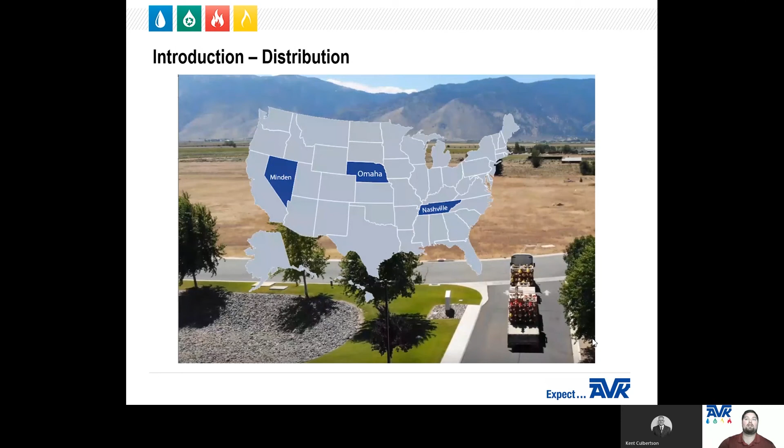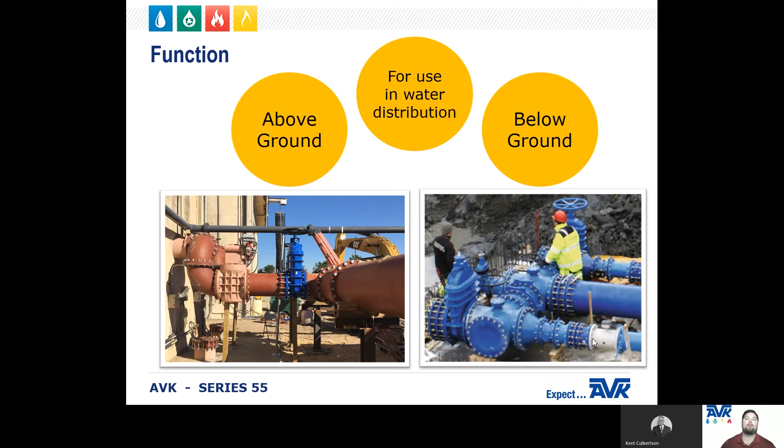Now, for the reason we're all here, the AVK Series 55 large diameter gate valve. Gate valves are one of the most commonly used valves in water distribution systems and are suitable for both above ground and below ground installation. These valves are used for on-off services only and are installed in pipelines as isolating valves. That also means that they should not be used as regulating valves.

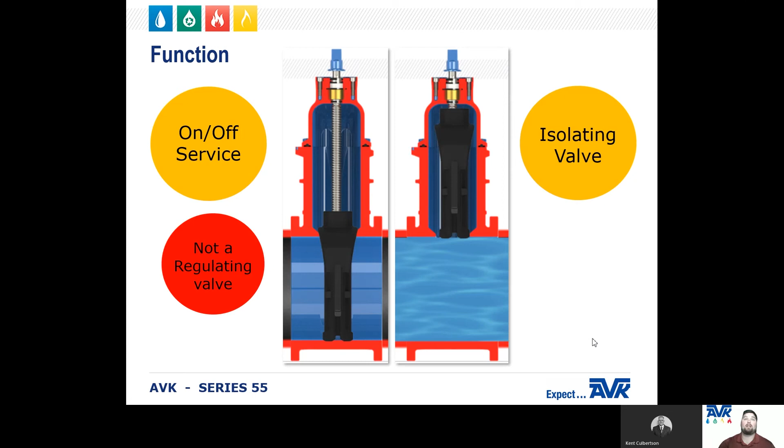The valve stem of the gate valve has to turn multiple times to go from open to closed positions. This slow operation prevents water hammer effects that can be caused by a quick closing valve. This also means that if you need a valve to open fast or close quickly in emergency conditions or to control flow, a gate valve is not the best choice.

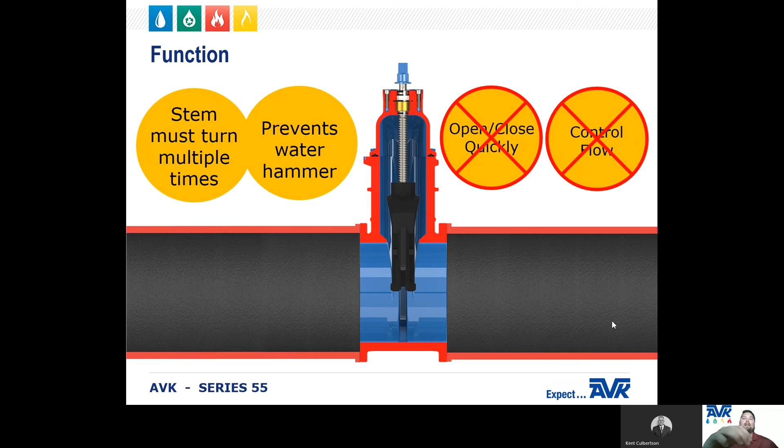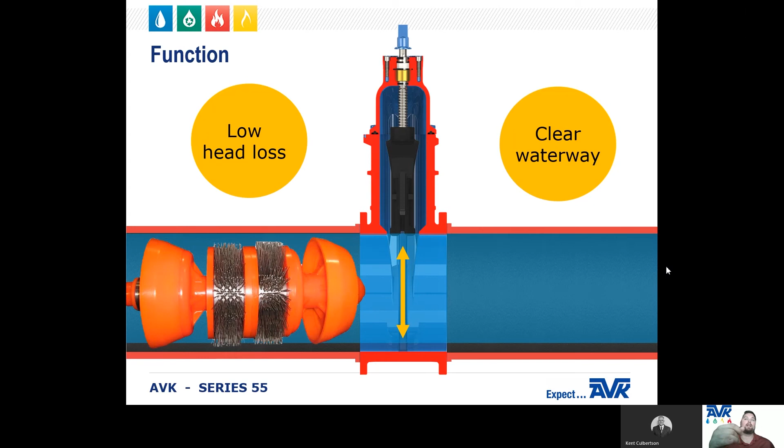Gate valves are often used when minimum pressure loss and a full bore is needed. When fully open, a typical gate valve has no obstruction in the flow path, resulting in very low head loss. And this design also makes it possible to use a pipe cleaning pig, as you can see in the photo.

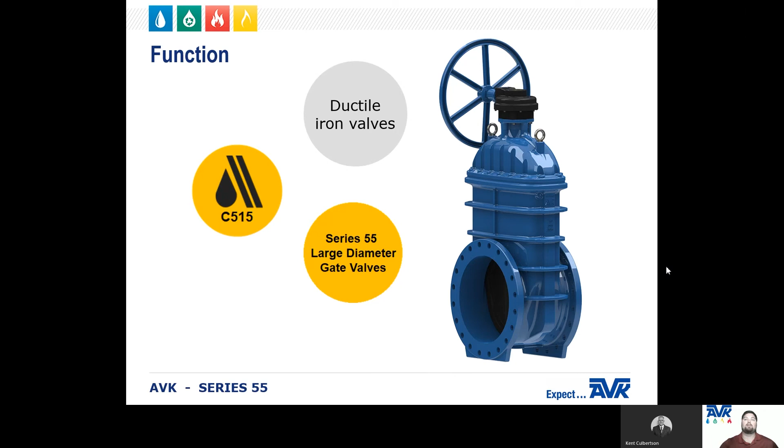These gate valves are cast with ductile iron and designed to meet the requirements of AWWA C515. There are only 2 types of gate valves, the OS&Y meaning outside screw and yoke, and NRS meaning non-rising stem, and we're happy to provide both of these options.

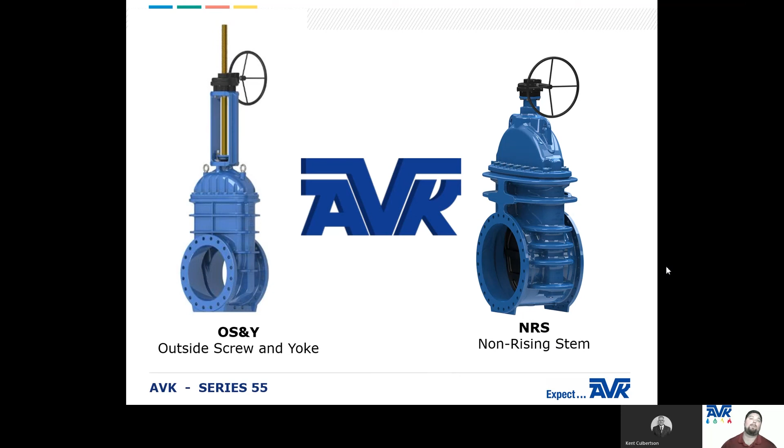If you look at your OS&Y, you can see the difference there in the photo. That stem actually carries the wedge up and that stem shoots above that hand wheel. So if you walk into your room or your pump or your lift station, wherever you may have your valve, you can see whether or not that valve is opened or closed based on the orientation of that stem. Where your non-rising stem, you can see the wedge is still in the bottom, and that wedge rides up and down on the stem inside the valve body and bonnet.

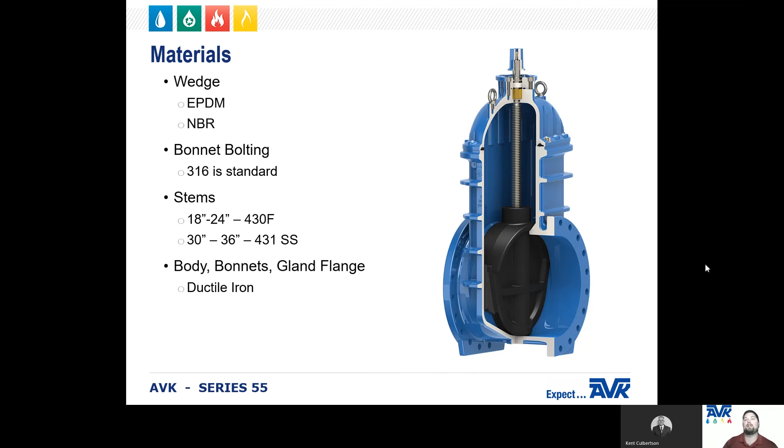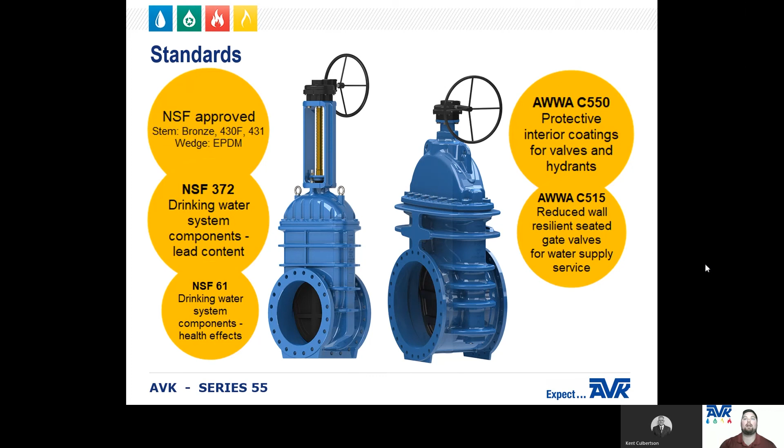As we discussed earlier, the Series 55 valve bodies and bonnets are made from ductile iron. The gland flange, wrench nut, and wedge core are also made from ductile iron. The standard bolting is 316 stainless steel. These valves are fusion bonded epoxy coated to the C550 standard, and the standard stem on the 30 and 36-inch valve is made of 431 stainless steel and 430F stainless steel on the 18 through 24-inch valves. When equipped with our standard 430 series stainless steel stems and an EPDM wedge, these gate valves are NSF 61 and NSF 372 approved.

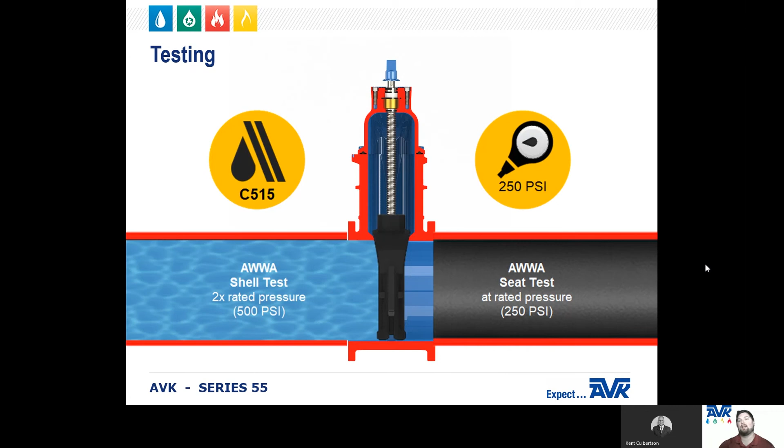We seat test these at a rated working pressure of 250 psi to start with. They are then shell tested to twice that at 500 psi. Although this valve is rated for a working pressure of 250 psi, most waterworks applications like your city main or rural water system operate at 50 to 80 psi. So in addition to seat testing this valve at the rated working pressure, we perform an additional seat test at 30 psi to ensure that the valve maintains a leak-tight seal at low pressures.

So looking at our testing, here's our overview. First, the gate valve is open and the valve is filled with water to eliminate any air. Then the gate valve is closed and one side is pressurized to the desired testing PSI, which as we talked about was 30 PSI, and then checked for leaks.

Then the valve is cycled, opened, and closed and tested at 30 PSI in the opposite direction. The process is performed again at 250 PSI. To pass these tests, there must be no leakage at high or low pressures.

Finally, the valve is opened and then subjected to a 500 PSI shell test. To pass this, no leakage through the valve shell or sealed surfaces is allowed.

So if anyone would be concerned about the valves leaking from stems, gaskets, or bolts, this should put their mind at ease that every single one of our valves is thoroughly tested with water at the factory before shipment, and through our serial number traceability, we can tell you all of the data regarding that test as well.

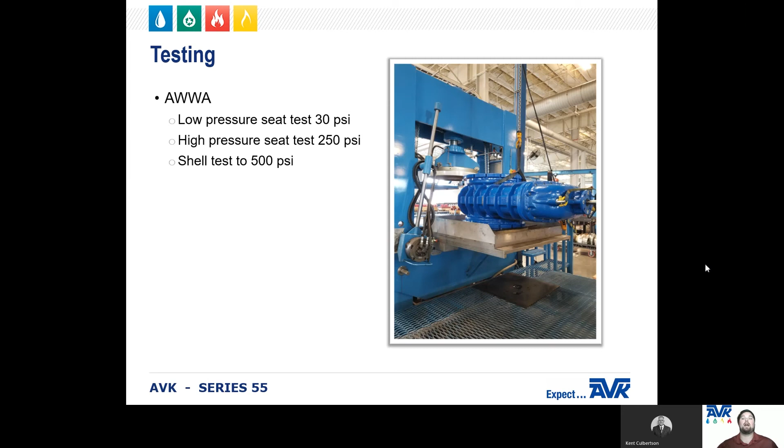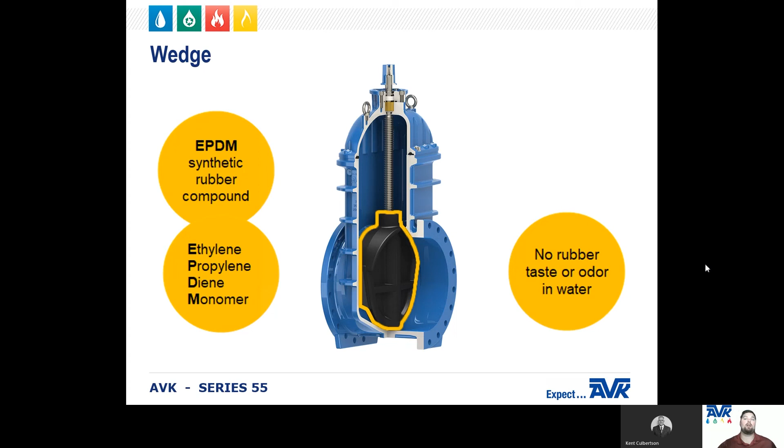The standard wedge is an EPDM rubber with a ductile iron core. It is resistant to sunlight, ozone, chlorine, chloramine, and other oxidizers, and it is also resistant to rubber set tearing and cuts, as well as it does not impart any rubber taste or odor to the water.

Now your optional coating on these wedges is an NBR. NBR stands for nitrile butadiene rubber and is sometimes referred to as Buna-N or simply nitrile. NBR is not intended for use in a drinking water system as it can impart that rubber taste to your water.

However, it is resistant to mild acids, petroleum-based oils, greases, hydrocarbons, and organic compounds that can sometimes be found in wastewater. Just like EPDM, it does have good resistance to rubber set, tearing, and cuts, but it is not resistant to long-term exposure to sunlight or ozone, and it does not stand up well to disinfectants.

Here at AVK, we strive to provide solutions. So when needing a Series 55, be sure to get with your territory manager and we'll help you determine what rubber will be best suited for you.

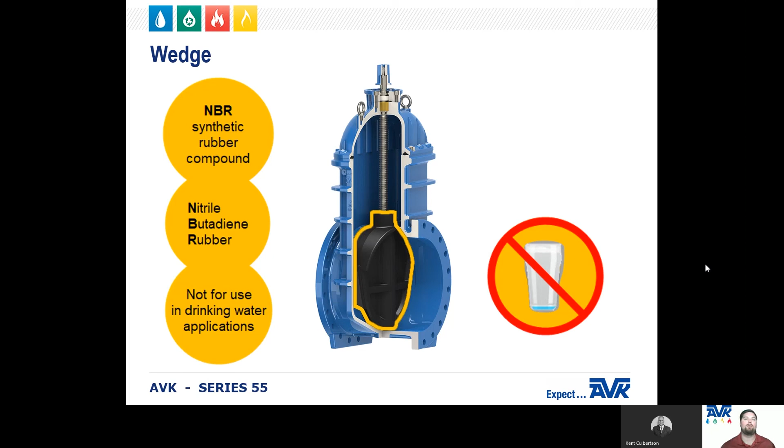The bronze wedge nut is located at the top of the ductile iron core of the wedge. The surrounding ductile iron does not allow for deformation of the bronze under heavy compression loads, such as over-torquing the valve in the closed direction. This allows it to withstand much higher closing torques than are required by the AWWA C515.

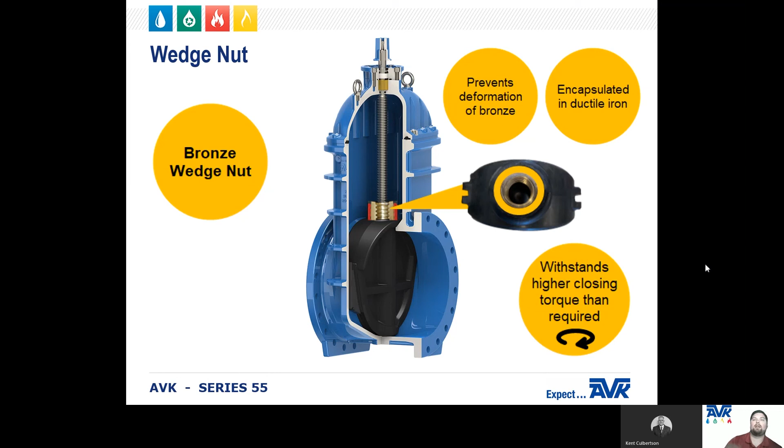The bonnet gasket on all our gate valves is an O-ring type gasket that wraps around each bonnet bolt. For any of you car gurus, imagine the head gasket on your engine block, designed to make sure that oil stays in the engine. Same concept. This design not only provides an excellent high-pressure seal against leaks, but also protects each bonnet bolt from the corrosive effects of water from inside or outside of the valve.

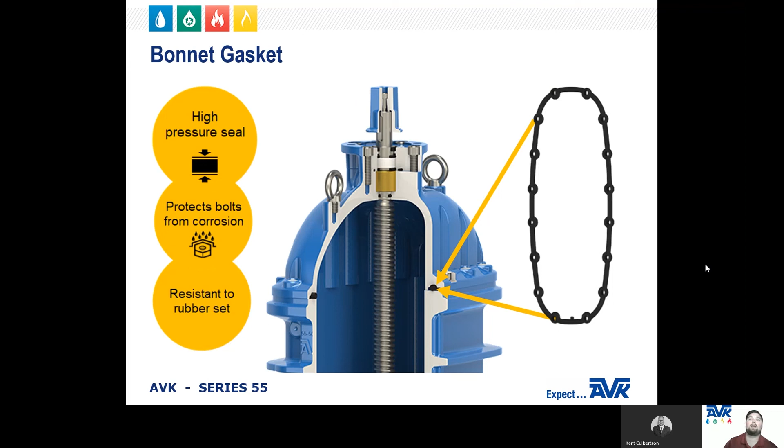The position of the gasket is maintained under pressure by the bonnet bolts and a groove that is cast into the underside of the bonnet. The standard rubber material for the gasket is NBR to resist permeation from organic compounds in the surrounding soil.

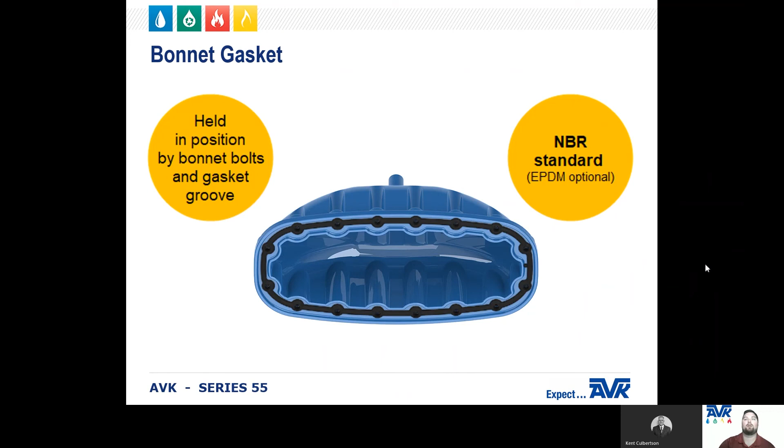The standard bolting for our gate valve bonnets is 316 stainless steel, as we mentioned before. The bonnet bolts are a hexagon-shaped socket head that require an Allen wrench to install and remove. They are threaded into a tapped hole that has been drilled into the valve body.

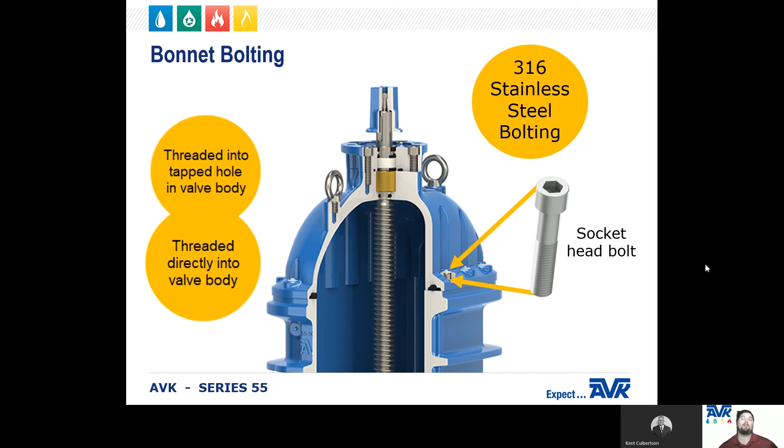So traditionally, you may see nuts and bolts holding a bonnet to the valve body, but with our valves, it's just a bolt threaded into a tapped hole.

The head of each bonnet bolt is then sunk into a recess that is cast into the top outer edge of the bonnet. After the bolts have been installed and tightened, a hot melt glue is applied over each bolt head to further protect the head of the bolt from corrosion and soil.

This design completely isolates the bonnet bolts from any contact with water from inside or outside of the valve. So if many years from now the valve is dug up and disassembled, the bonnet bolts would still look brand new. And with that being said, I'm now going to invite our Eastern U.S. sales manager, Kent Culbertson, to give a unique little story about the durability of our bolting system.

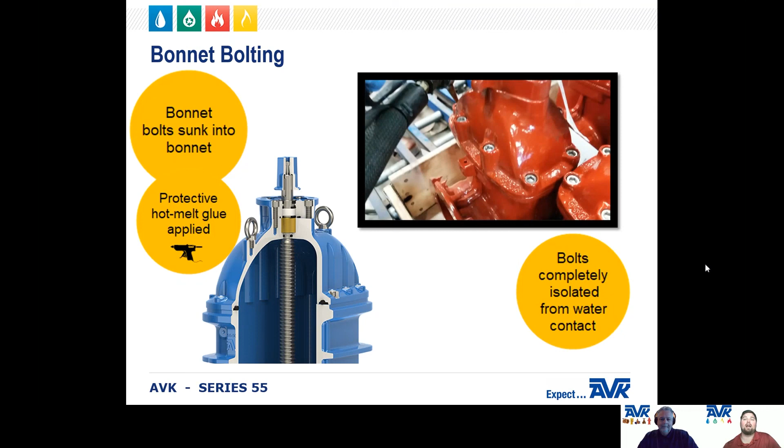Keep in mind that although these are not Series 55 valves, the bolting system is identical. So Kent, the floor is yours. Thank you, Sawyer. Well, this is a story about...

2012. AVK was contacted by a utility northwest of Minneapolis, an area with extremely hot soil. The inquiry was to see if AVK had a gate valve rebuild kit with new O-rings. The utility had dug up several 1992 AVK valves, in this case 6-inch, for a street widening project. To their disbelief, the valves, which they had forgotten about, were in great shape 20 years later.

We learned that the utility had forgotten about the valves, which was, again, very unusual because prior to this, a valve installed in the 90s in this region had usually lasted about 4 to 5 years. We did a little bit of research. What made it even more amazing was AVK had not standardized on stainless steel bolting until 1998.

So these 1992 valves had standard zinc-plated bonnet bolts that were, again, in like new condition. So I traveled to Minnesota, inspected the valves, and surprised the utility with a new shipment of 2013 AVK valves so that we could ship the 92 models, 20 years old, back to the factory for inspection and testing.

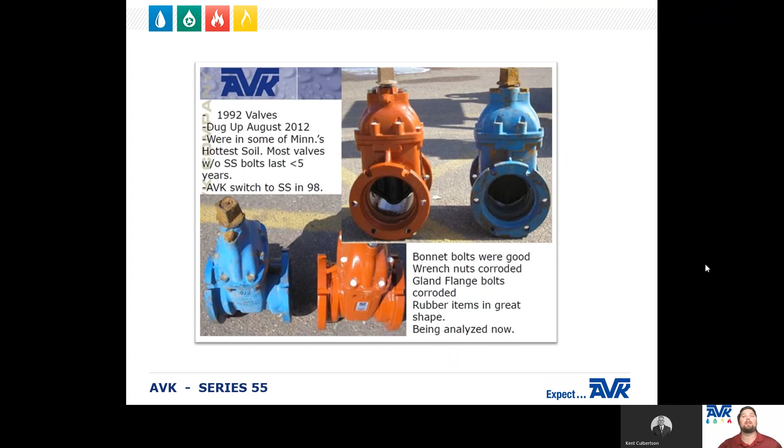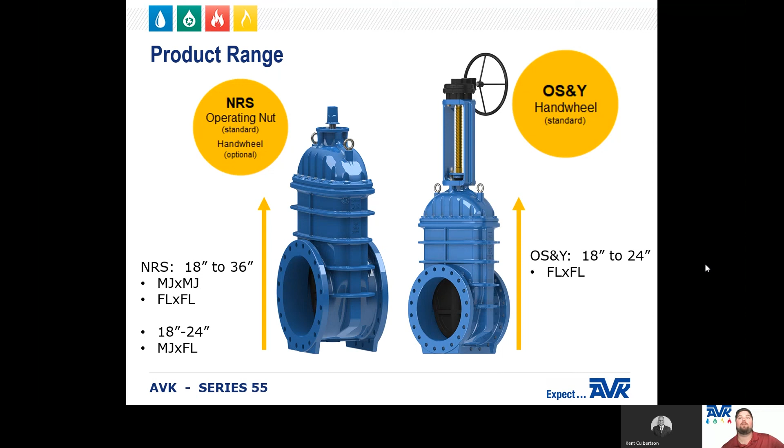Now, the NRS gate valves are available from 18 to 36 inches in diameter, while the OS&Y valves range from 18 through 24 inch. On OS&Y valves, the handwheel comes standard and are available as an option for NRS.

A mounting flange along with a keyed stem are standard equipment on all Series 55 gate valves so that a gearbox or electric actuator may be installed, and both the mounting flange and the stem are standard dimensions.

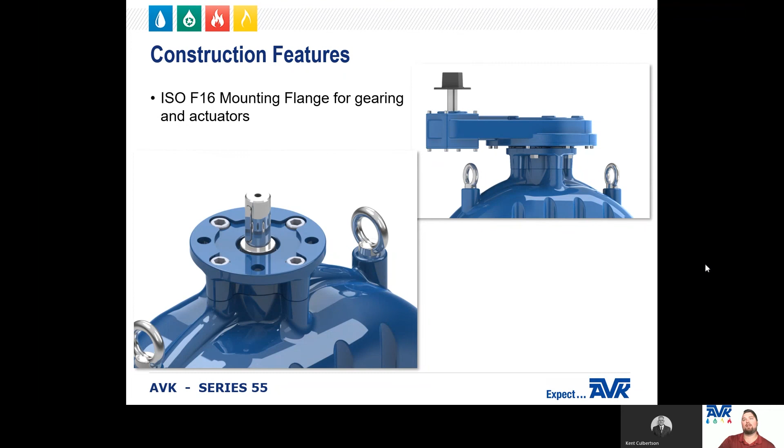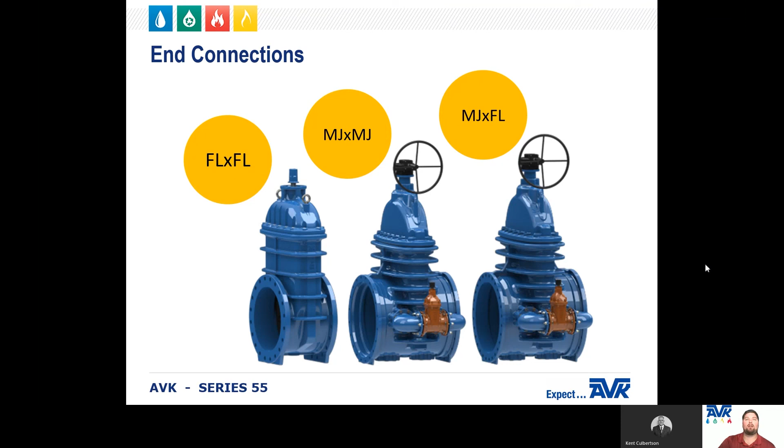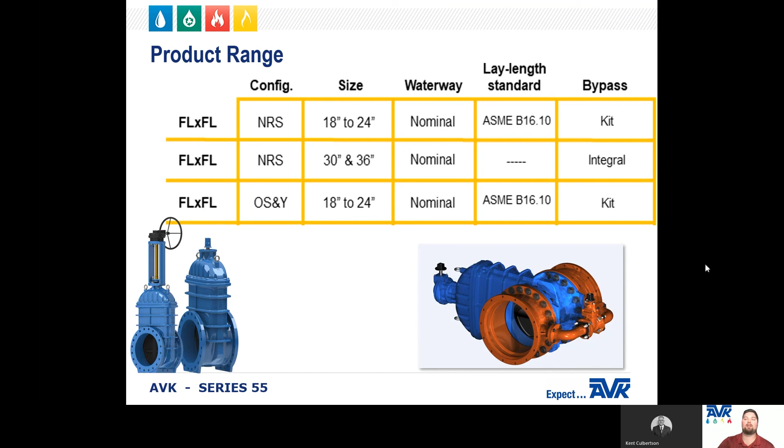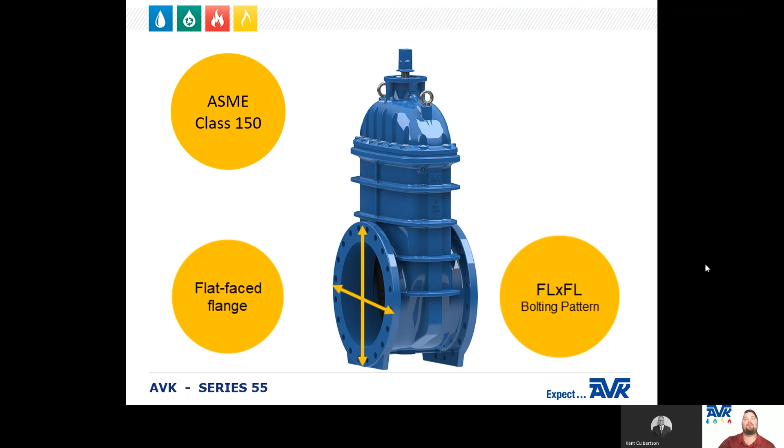The Series 55 flange by flange valves comply with the bolting pattern required for Class 150 flange standards, and these flanges are flat-faced with no raised sealing surfaces.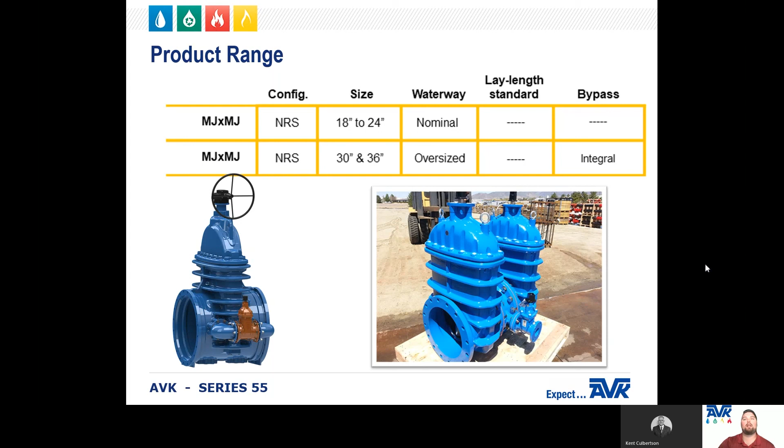For the MJ by MJ, our product range is from 18 to 24 and a 30 and 36. And as you can see, the waterway is either nominal or oversized based on your size.

So we've mentioned bypass systems a few times now. So what is the purpose of a bypass? The primary purpose is to open a smaller valve to equalize the pressure on both sides of the larger valve before opening, which makes it easier to open that larger valve.

It can also be used to control the filling rate of a dry pipeline downstream of the large gate valve. The slow filling allows enough time for air to escape from the dry pipeline to reduce the chance of damage to that line that can be caused by filling the line too fast.

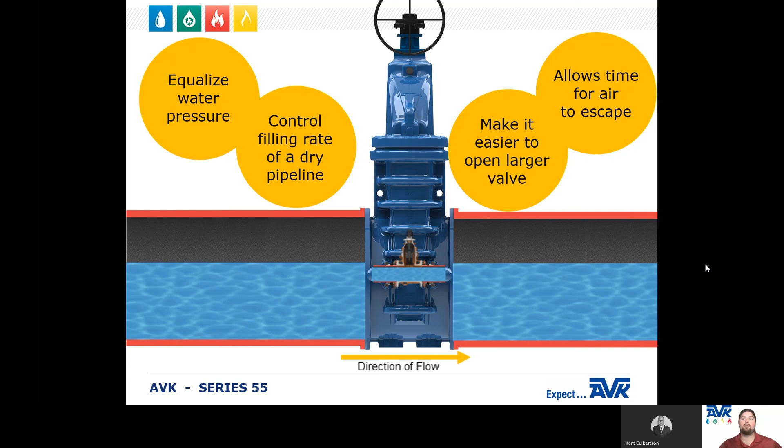Now, that smaller valve that is used will typically be either our Series 45 or our Series 65.

As we mentioned previously, the Series 55 18 through 24 inch flange by flange valves meet the standard for the ASME lay lengths. However, the short lay length specified in the ASME standard does not allow enough room between the wedge cavity and the end flanges of the body to include integral bypass ports.

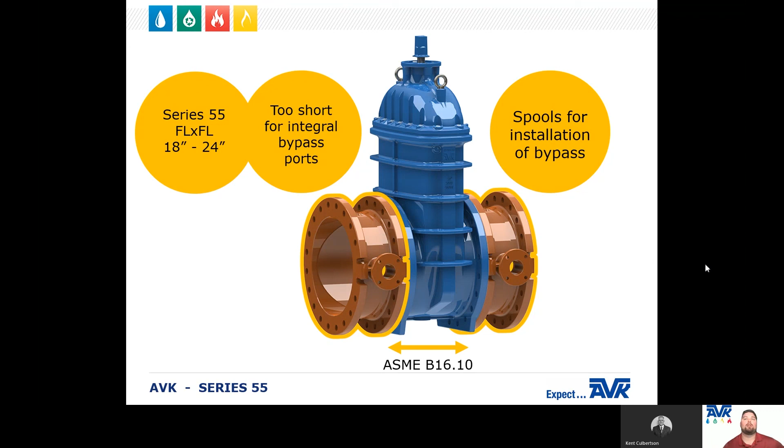So we developed spools that can be bolted to your pipe flange ends to enable a bypass around the Series 55 valve. Now, that optional bypass can be installed by us or can be ordered from us as a kit.

That kit consists of 2 bypass spools that can be bolted to a flange Series 55 gate valve to result in a flange by flange, MJ by flange, or an MJ by MJ configuration. And it includes the bypass elbows, the gate valve, the MJ gasket kits for the small valve, and all required gaskets and hardware. Your hardware is available as a zinc plated, a 304, or a 316 fasteners.

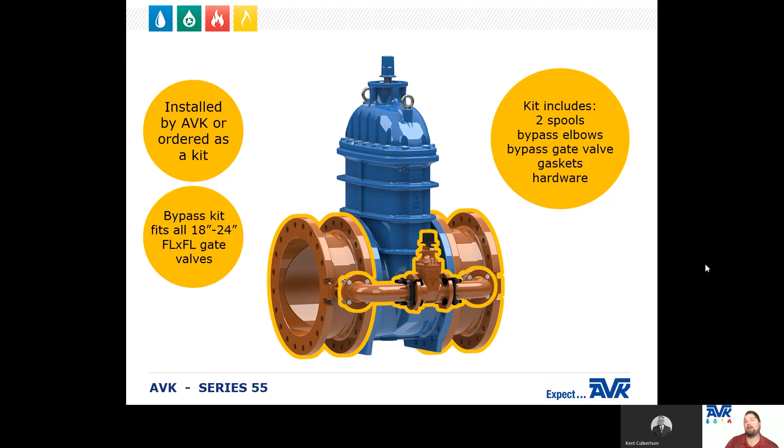Now, since the lay length of all manufacturers' flange by flange valves up through 24 is dictated by a standard, our bypass kit will fit any manufacturer's 18 through 24 inch flange by flange gate valve.

Now, the lay length of the 30 and 36 inch valves is not dictated by a standard. So that makes it impossible for us or any manufacturer to create a universal bypass kit for the 30 and 36 inch valves. So we developed the Series 55, 30, and 36 valves with integral bypass ports.

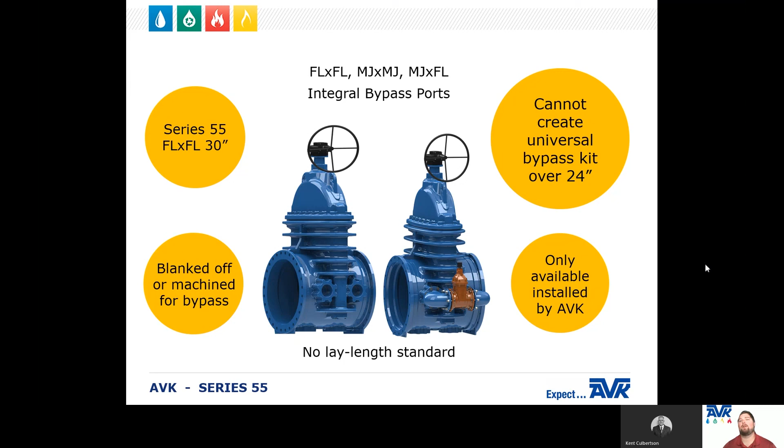Now, these ports can be blanked off or machined to mount an optional bypass system. The optional bypass system for these large valves is only available installed by us.

If you need a 30-inch valve without a bypass system, the 30-inch flange by flange valve is available in the shorter lay length without the bypass ports.

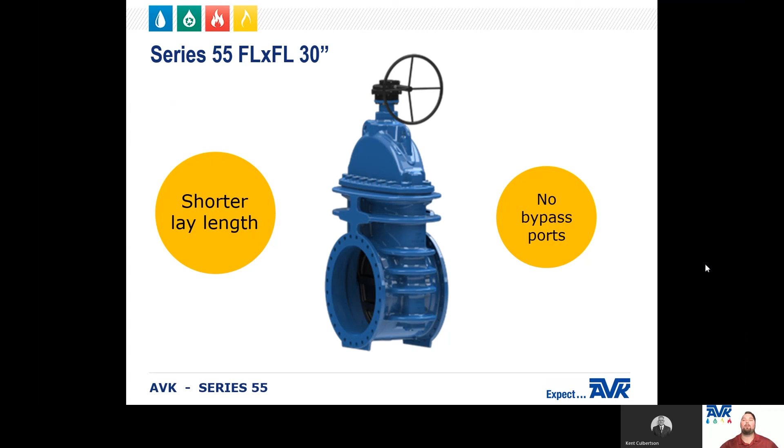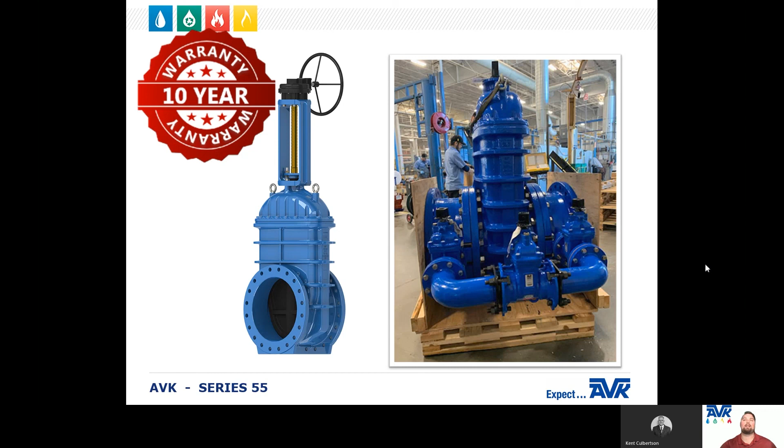And the Series 55 carries a 10-year warranty. Here you can also see a special order Series 55 that included a triple bypass system. We're very happy to provide a solution for such a unique request from a customer.